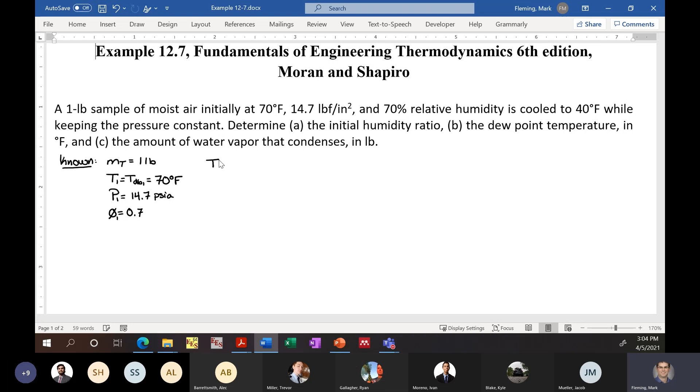Now we're going to be cooling this down to the final state. So this would be the final temperature, T2. Note this is the dry bulb temperature at state 2, and this is going to equal 40 degrees Fahrenheit.

So we have our final state, and we'll note that this is done in an isobaric fashion, so P2 is equal to P1. Now in terms of drawing this system out, let's try and put a visual to this. Basically what we're going to do is we're going to have a piston cylinder style setup. So as we're changing the temperature to maintain a constant pressure, we're going to have the piston be able to move, and that way the pressure in our system remains constant. So this is basically the setup that we have. Now we'll note that we're going to be dealing with moist air.

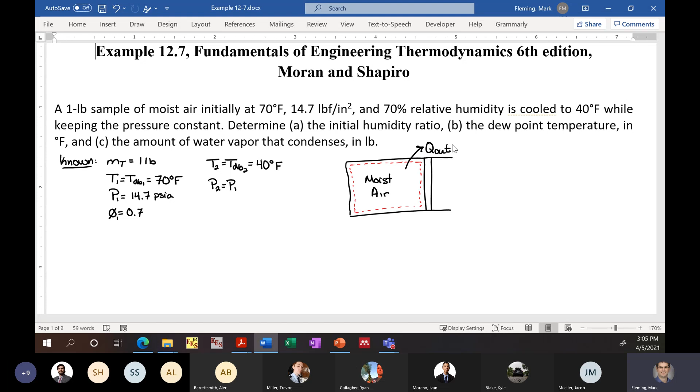The moist air represents the air plus the water vapor inside of our system. We'll note that we're going to be cooling it down, so we had some heat transfer out that's going to cause some of this water to condense.

We want to look at how we go about mathematically modeling this, and what are the things that we need to find and what we need to assume.

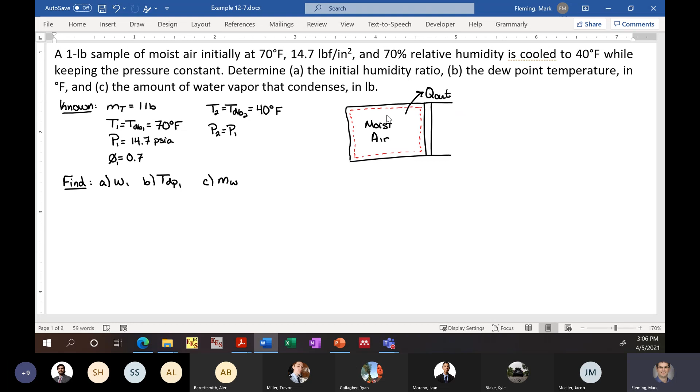In terms of our find statement, first we're going to use what we know to calculate the humidity ratio at state 1, also called the specific humidity. We're also going to calculate the dew point temperature at state 1. And for part C, we're going to calculate the mass of water that condenses, the amount of liquid water inside this cylinder after we change the temperature. That's what we're going to be looking for.

Now, in terms of getting to the final point, we're going to have to make a few assumptions. Let's go ahead and write down everything that we want to assume in terms of our analysis.

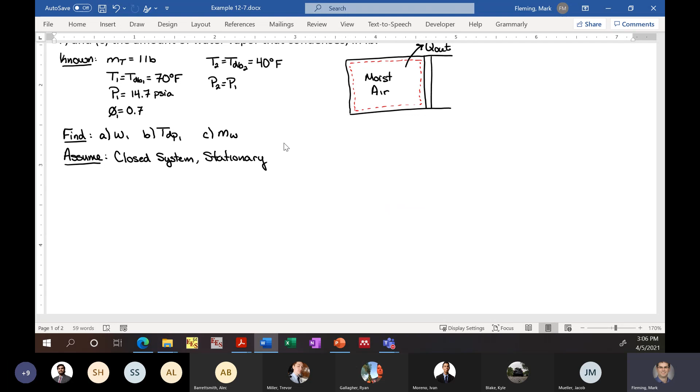We're going to note that this is going to be a closed system. We're going to note that we're dealing with a stationary system. We're also going to assume that we have an ideal gas and an ideal mixture.

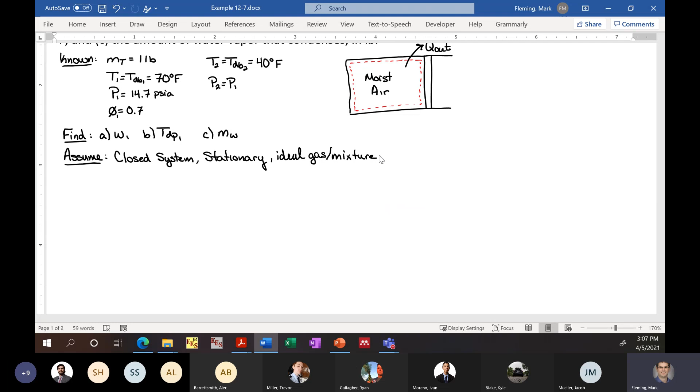So those were our base assumptions leading into the psychrometric analysis that we needed to do. Those are the main things we're going to have to assume. Once we've got that down, we can push forward into the actual analysis.

Now, in terms of the analysis, we're going to start by looking for our first deliverable, which is the humidity ratio here at state 1. If we recall from the base definitions, the humidity ratio is the mass of the water vapor at state 1 divided by the mass of the dry air at the first point.

Now, we don't know either of those, but if we know this is an ideal gas, we can relate these to the partial pressures. When we did that, we ended up with a constant out front, 0.622, which was the ratio of the molecular weights. We then had our partial pressures: P of the vapor at state 1 over the total pressure at state 1 minus the partial pressure of the vapor at state 1.

So this was the partial pressure of the vapor divided by the partial pressure of the air. We said we could relate the air, since we're assuming only two parts, to the total pressure and the partial pressure of the vapor. We were given the initial pressure, that was 14.7 psi, and the only other variable here was the partial pressure of our water vapor.

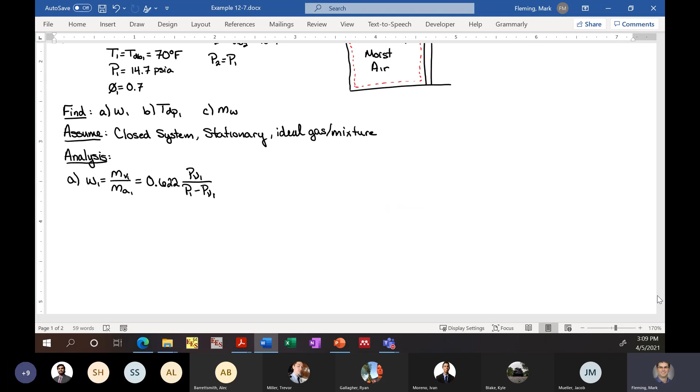So we just need to determine the partial pressure of the water vapor to make this calculation. If we think back to other things we know, we're going to have to use another definition. If we go up to what we were given, we have a total mass, temperature, and pressure.

And we were also given this last value right here, which was our relative humidity. So let's go ahead and see if we can do something with the relative humidity. Now, the relative humidity at state 1, by definition, is the mass of the water vapor divided by the mass at the saturation condition of the water vapor.

When we did the ideal gas analysis on this, we found this is equal to the partial pressure of the water vapor at state 1 over the saturation pressure at state 1 for the same gas. Again, these are at the same temperature, T dry bulb at state 1 for both of these lookups. At this point, we were given this value, that was 0.7.

So if we rearrange this, we can now find the partial pressure of the vapor. That's going to be a function of the relative humidity at state 1 times P sub G at state 1. And so we just now need to look up what is P sub G at state 1.

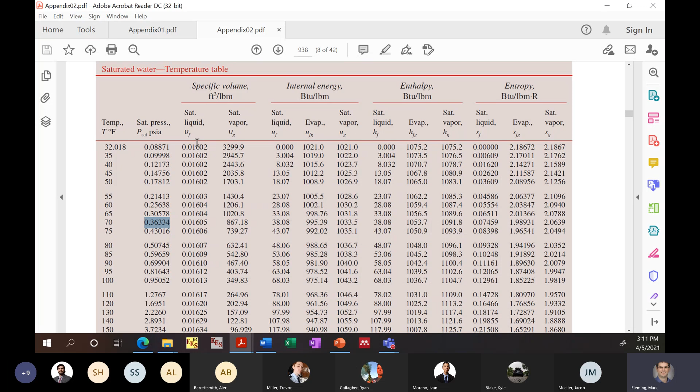Now remember, P sub G was the saturation pressure at the given temperature. So if we pull up Appendix 2, we just need to know the temperature, which was 70 degrees Fahrenheit. We look right here in the table and find P saturation at that point, and that is 0.36334 psi.

So we'll use P sub G1. We looked it up at the given temperature, and again, that was 0.36334 psia. And so we have our first lookup value.

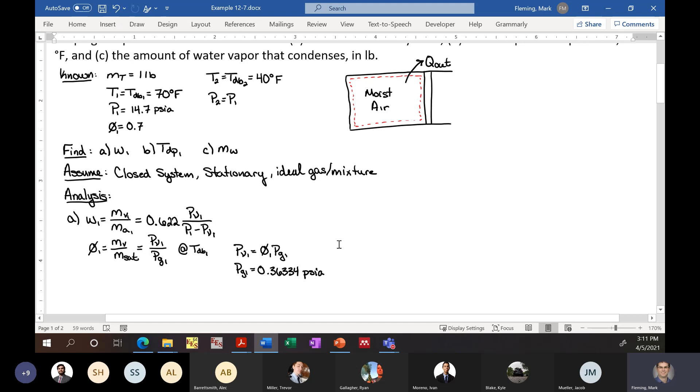Once we've looked up this value, we know the relative humidity, so we multiply that by 0.7, and we can get the partial pressure of the water vapor. This is going to be 0.25434 psi, and we'll note that that's the actual pressure.

So we see that the partial pressure of our water vapor is very, very low in terms of the total pressure, only a small fraction. Because it's at a low temperature, we had to look up the saturation condition, and that is the value. So the partial pressure of the water vapor will always be very small, which tells us that water is only a small component of the moist air.

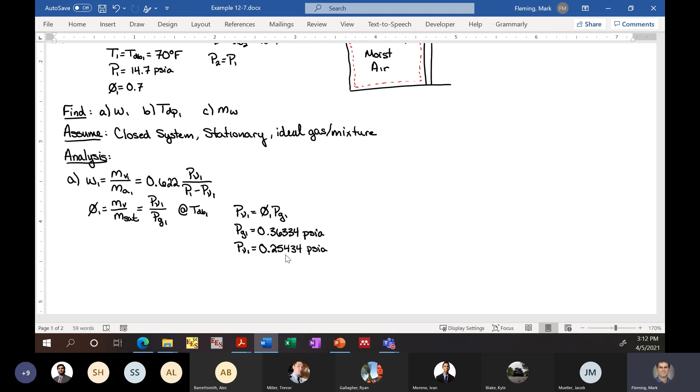Okay, so now that we have the partial pressure of the water vapor, and we have a total pressure, we can go ahead and compute the humidity ratio at state 1. This is going to equal 0.01095, with units of pound of vapor divided by pound of dry air. So there we go, we have our first calculation for our psychrometric system: the humidity ratio at state 1.

And so all we did here is we combined our base definitions, used a table lookup, and were able to find that initial point. Okay, so now we can go ahead and move on to part B, where we were asked to figure out the dew point temperature.

Now, if we recall the dew point temperature, our base definition for this is T dew point, which is equal to the saturation temperature at the given partial pressure of the vapor. And so we have to go ahead and do this lookup.

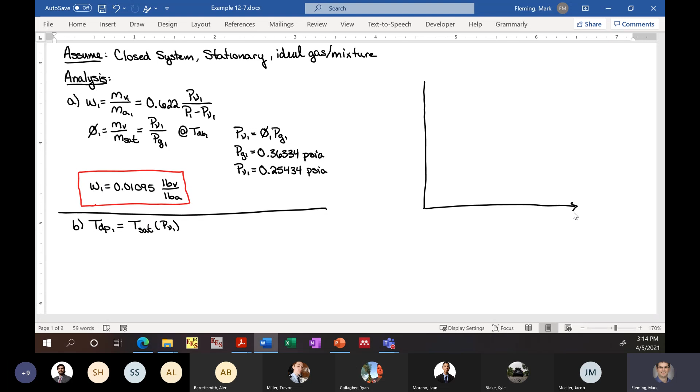Now, before we go too far, I do want to draw a T-S diagram to give us some visuals on this system, just so we're keeping track of what we're doing and where we're going in the table. So this is S, this is going to be our T-axis. We'll draw in our vapor dome, trying to keep it mostly to scale, and we're starting somewhere out here. This is our initial point.

And we're going to have to figure out some temperatures, which we'll do here in red. If we drew a dashed line over to the left-hand side, this would equal the dry bulb temperature at state 1. We'll label it here once we get all the lines in. So again, that is the first temperature that we had. Let's go ahead and get some pressure lines in here, which we'll do in green.

So we have the partial pressure of our vapor. Let's do a little shallower here - this is going to be the partial pressure P vapor 1, and again this would go down over here, and that would be the vapor pressure. We already looked up P sub G1, so let's note that P sub G1 will be calculated right here. So this is now P sub G1, at the temperature of state 1, and we looked up that pressure right there.

And so what we want to do is find the dew point temperature at state 1. If we go back, we said the dew point is the saturation temperature for the given partial pressure. So what we do is follow our line of constant pressure down here.

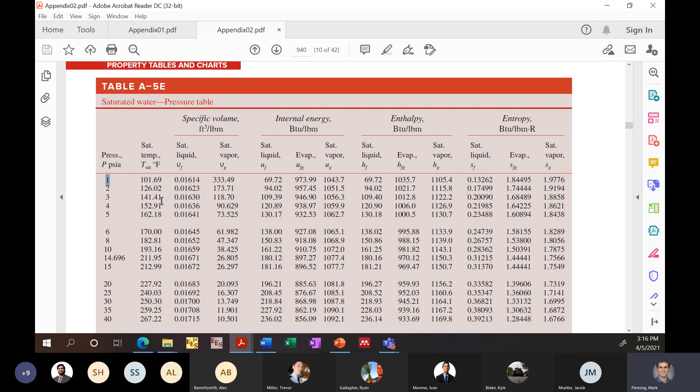We can't do any linear interpolation. So what we have to do for almost all of our psychrometric calculations is go to the temperature table. Even though we know pressure, we're going to use the temperature data for our linear interpolation.

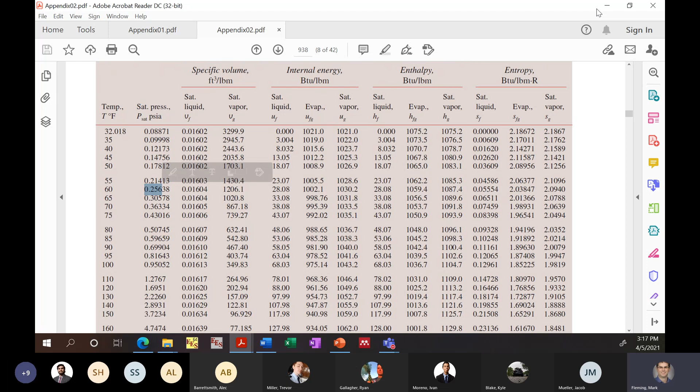So if we looked at this, our pressure was 0.254. If we look, we see 0.256 gives a value, and 0.214 gives another value, so it's going to be somewhere between 55 and 60 degrees Fahrenheit. We'll have to do a little linear interpolation, but 0.256 is pretty close to 0.254, so we expect it to be pretty close to 60 degrees Fahrenheit.

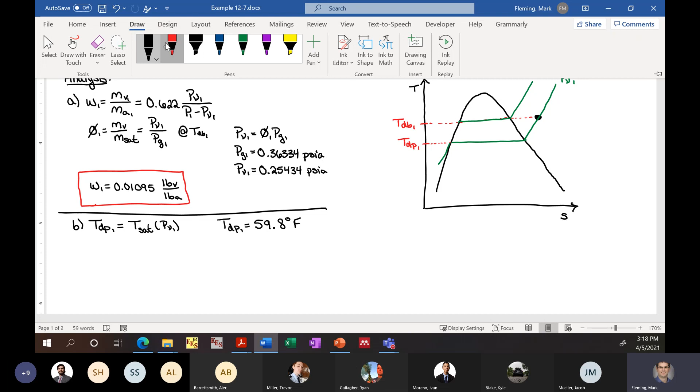I'm going to save us some linear interpolation here. What we're going to find is if we go to the table, the dew point temperature for state number 1 is going to equal 59.8 degrees Fahrenheit. This value was determined just from using the partial pressures and going to the table for our lookup. That's all we have to do for the dew point temperature. We're basically cooling it down to the saturation condition using the partial pressure of the vapor, and we can now calculate that temperature from the lookup tables.

So basically what we've done is gone to 2 different points in the table. First, we looked up the partial pressure at the given temperature for the saturation, so we looked up P sub G, using the temperature that's known. Then we can also repeat the process using the partial pressure that's known, and that would be our dew point temperature. So keeping track of what goes where in terms of the lookups is important.

Now if we want to move on to part C, it was asking us how much water was going to essentially condense in this process. We said, well, instinctively, the dew point is the temperature where condensation begins. Our final state is at 40 degrees Fahrenheit, so 40 is less than, well, we'll just say 60 for rounding purposes. We are going to have condensation occur because the temperature is going to go below this point.

Now, there's a few different ways we could calculate this. The first way is just to do this calculation: we know that our state 2, T2, is going to be less than T dew point 1, so we could have condensation.

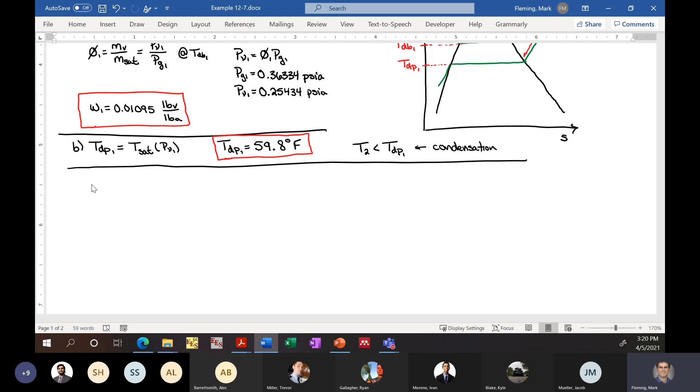So that's kind of our first example showing that we know condensation is going to occur. The other thing we could note, if we weren't sure what was going on, is we could figure out what's being held constant in this process and make a comparison. In this process, we're cooling it down, so if we didn't have condensation occur, what would happen? What would happen if we maybe had a temperature that was higher than our dew point?

If we thought about it, in this case, no phase change would occur. So we could say our humidity ratio here would equal a constant. And so if the humidity ratio is constant, maybe we could use this to check the final point. Now, I want to point out it's not constant all the way through our process—it would only be constant outside of the two-phase region. So when it is a vapor, it remains constant.

Now, the reason I want to show you this technique is because this is the technique you're going to need on, I think, your second actual homework problem. That's the one where you're going to look at some partial pressures and figure out how much of a change happened in the system. This is the sole reason I wanted to discuss this.

So if we can assume right now that W is going to equal a constant, let's see what happens when we say W1, humidity ratio of 1, has to equal the humidity ratio of 2. All that we're saying here is that we have the mass of the vapor over the mass of the dry air equaling a constant. This is what we mean by a closed system—we can't have anything change that. We just want to see what happens if we make that assumption. We calculated W1 earlier, so we can go ahead and set this equal to W2.

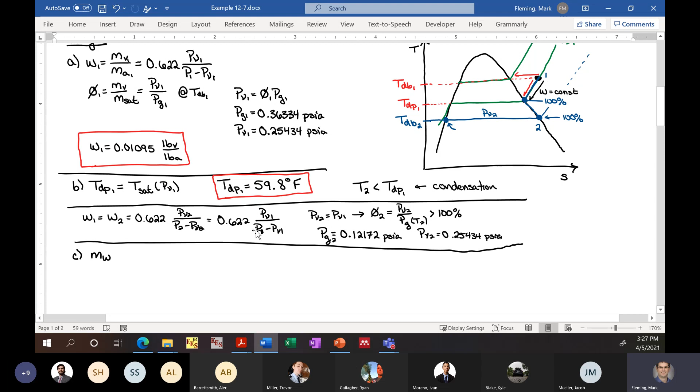Part C, we're looking for the mass of the liquid water. Now, to get the mass of the liquid water, we are going to have to use conservation of mass. So that's going to be our key thing here, and we're going to do it on a species analysis.

So for conservation of mass, noting that it is a closed system, we'll start with air. The change in the mass of the air for the system, by definition of a closed system, we are having a control mass. We're just tracking the same amount, so we can have no change in mass of the air. What this means is the mass of the dry air at state 1 has to equal the mass of the dry air at state 2.

And so we can generally say that this is just the mass of the dry air. That's nice, but why does that help us? Well, let's go ahead and take a look at the water side. The water side includes both the liquid water and the water vapor.

Noting that we have a closed system, delta M of the water has to equal 0. And we said, well, this would equal the mass of the water at the final state minus the mass at the initial state, we'll just call that I. And so we have this change in mass that has to equal 0. But what we know intuitively from just what we've done before, we said, well, we know water is going to condense out of this system.

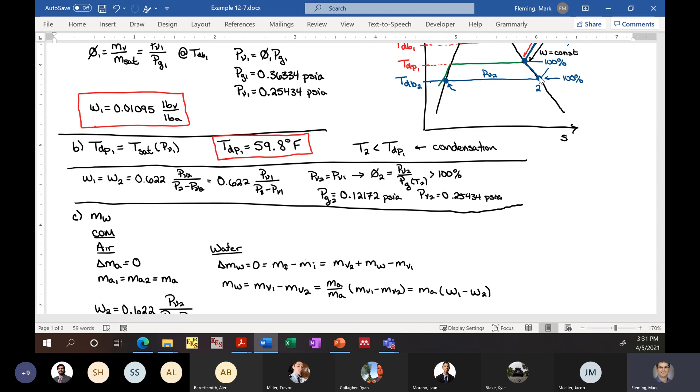For the final temperature, water condensed out, and because water was condensing out, that means we had to be at the saturated state. So we have one other piece of information: the relative humidity at state 2 equals 100%. If it's 100%, that means P vapor 2 has to equal P sub G2, which we looked up earlier. That equals 0.12172 psia.

So now we have the partial pressure at state 2, we can substitute that into our humidity ratio at 2, and find the humidity ratio at state 2. This is going to equal 0.00519, units of pound of vapor per pound of dry air. That gives us the humidity ratio at point number 2.

We need the mass of the water. This will equal the mass of dry air times the humidity ratio of 1 minus the humidity ratio of 2. We now have the humidity ratio of 1 from our first calculation, and the humidity ratio of state 2. But we're still missing the mass of the dry air, so let's figure that out.

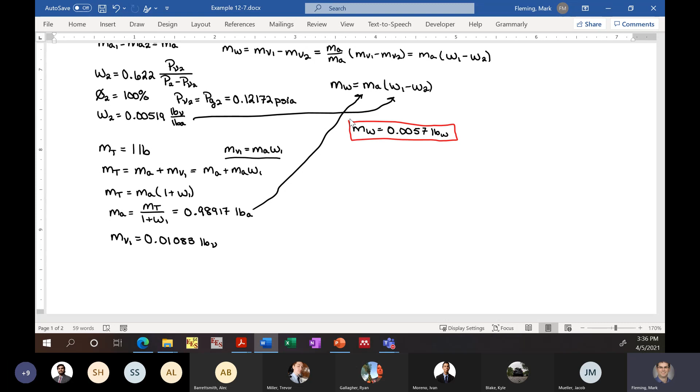Units on this are going to be a pound of water. We'll go ahead and do that. We can see that the amount of water we've condensed is very small, but there is a large amount of energy associated with this phase change, so it's important that we consider that. Again, this was just practice using all of our definitions, applying some mass balances.

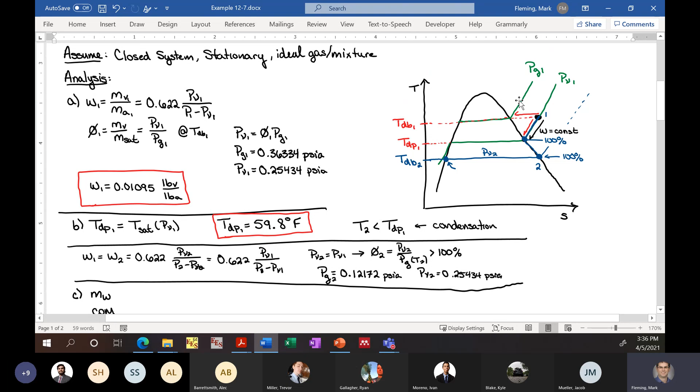The important thing here to remember is making sure that you get all of the lookups correct, and that you can visualize the process on any sort of phase diagram. Here we used a T-S diagram. We can see what our partial pressures were and where we had to look things up in the table, and why we did those lookups for this given problem.

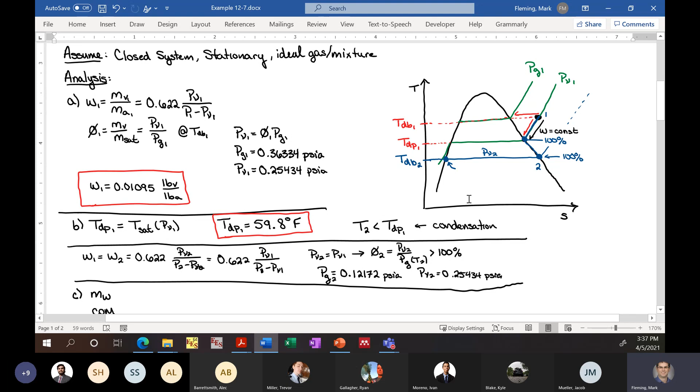So that is going to be the end of this example problem. If you have any questions about this, please let me know. Otherwise, at this point, I want to go ahead and switch gears.

Push into the new topic for this week, and that is going to be the psychrometric chart. This is going to be the new piece we're talking about this week, and it's very important for HVAC applications. We're going to be using this quite often in our discussions to help with our analysis, so we want to spend a little time working with this.

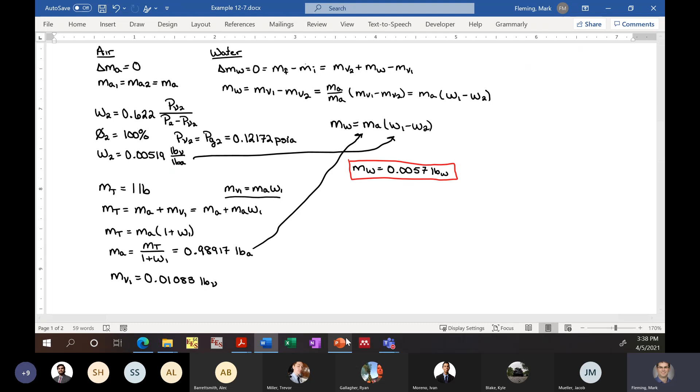Now I'm going to see if I can fix the screen here. Give me one second. See if I can get this to show up. Okay, well, looks like we'll just have to go with this as it is — the screen's a little messed up right now.

The psychrometric chart is what we want to use to help bring all of these terms together, to help us visualize what's going on in terms of air conditioning processes. Before we get into what the psychrometric chart is, we want to talk about the key terms that we need to know for any sort of process.

In terms of these process terms, the first is that we need to have the dry bulb temperature. If you remember, the dry bulb temperature is our standard temperature measured by any thermometer. This is going to be one of the key measurements that we will make, so we're going to want to include this on the chart.

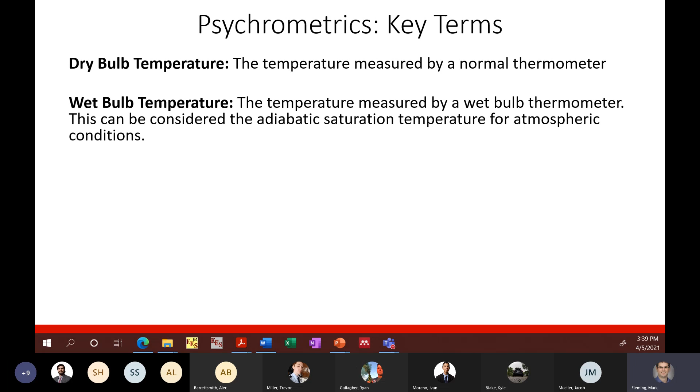We're going to want to be able to figure out what the wet bulb temperature is. This is important for the adiabatic saturation temperature, which was historically used with the psychrometric chart to help determine the initial state. So we're going to want to figure out what the wet bulb temperature is.

We're also going to want to find the dew point temperature, because that tells us if we drop below a certain temperature, we'll have water condense. So we need to know that, to be aware of where we are for phase change.

We're also going to want to include our two new terms: our humidity ratio, which tells us the amount of water vapor in the air, and our relative humidity, because this was the term when we talked about atmospheric science — that's pretty much the most common value that we have.

They said that's pretty important for human comfort. Humans generally like somewhere between 30 to maybe 60% relative humidity. If it's too high, it doesn't feel very comfortable; if it's too low, it feels very dry. Somewhere between 30 to 60% is pretty good for comfort, with 30 to 50% probably considered standard. So we want to be able to relate all of these terms for most HVAC processes.

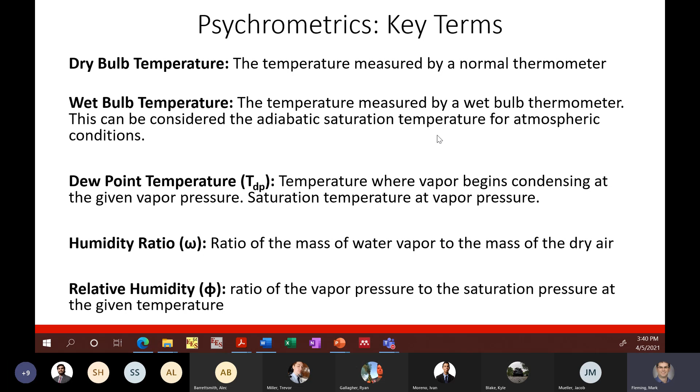That's the whole purpose of the psychrometric chart. It brings all of these concepts together for HVAC systems, so heating, ventilation, and air conditioning systems. One thing to note is that for HVAC systems we assume the total pressure is essentially 1 atmosphere.

If we're dealing with 1 atmosphere of pressure, we can use this chart to do all of the lookup. This reduces the number of variables down to essentially 2, because we fix the pressure at 1 atmosphere. If you think of atmospheric science, everything is about one atmosphere. If you change positions on the globe, like in Denver, it might be a little different, but we can use this as a pretty good approximation for most HVAC systems.

So what we wanted to do is create this visual and put all of these pieces together. Now, this is kind of a simplified view of what the psychrometric chart's going to do, and we'll look at what we can find on the chart.

What we want to be able to read is our temperature, so the dry bulb temperature, that's our actual temperature. We said that is going to be one of the most common measurements we have, so that's going to be the x-axis. One of the most important outcomes we want is our humidity ratio, which is also called the specific humidity.

We're going to put that on the y-axis so we can easily look it up once we've established where we are, and be able to look that value up. We wanted to be able to draw a straight line and get that value with some precision. That's going to be on our y-axis.

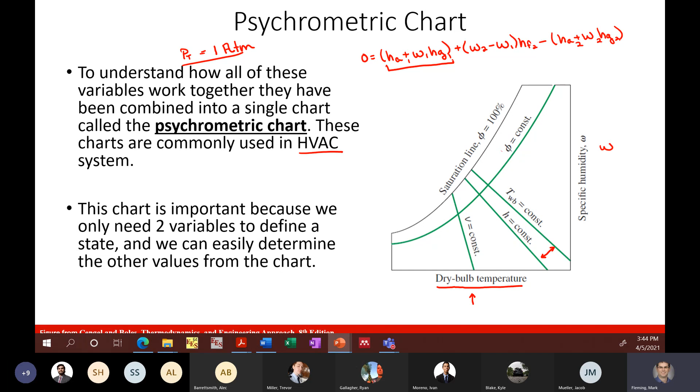So H air plus the humidity ratio at 1, H sub G1, noting that this is at state 1, and this would be state 2 over here, state 2, 2, and 2, then we had 1 over here. Now what we can do is combine these terms into a single enthalpy, so this will be H2, this will be H1. So we get 0 equals enthalpy 1 minus enthalpy 2, plus W2 minus W1 times the enthalpy of the water.

What we're going to see, and why these lines are so similar, is if we recall from the example we just worked, W2 and W1 are our specific humidity ratios. Those are pretty small numbers. If we go to the numbers we got before, state 1 we had W1 equal to 0.010, roughly 0.01 for the first one, and the second value was 0.005. So we're basically looking 3 decimal points out for those, and the change in that is going to be pretty small.

So we say that this value is pretty small, and the enthalpy of water on the liquid side is much lower than our vapor side, so we can kind of say this value is small, almost 0. So what we'll see is the lines of constant wet bulb and constant enthalpy will basically be the same.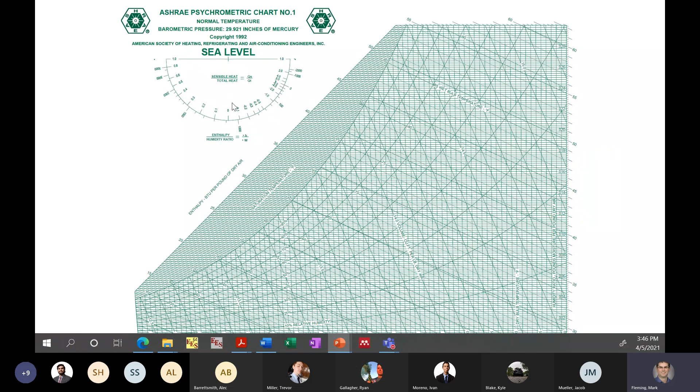This I think is the SI units version. And then I provided one also here, this would be the English unit version. So we can do this in both sets. These are again from the American Society of Heating, Refrigerating and Air-Conditioning Engineers, so basically ASHRAE, same thing we have here, just higher resolution, a little better for your lookups.

And so this is what the actual psychrometric chart looks like. We're going to need to be able to use this for some of our homework problems. So a few things I want to point out about the chart.

The first thing we have over here, the right-hand side, is going to be the humidity ratio. I want to point out that the humidity ratio is these values right here on the inside portion of the lookup. Again, this is the humidity ratio. The thing to note about this version is it's going to be grams per kilogram in terms of units - grams per kilogram of dry air. So you have to pay very close attention to all of your lookups and units on your calculations.

In terms of other parameters, we see these diagonal lines coming up - these are lines of constant relative humidity, and we can see these values here. Then we have the saturation line over here on the left-hand side, that's the kind of limiting case, and that would be the 100% relative humidity.

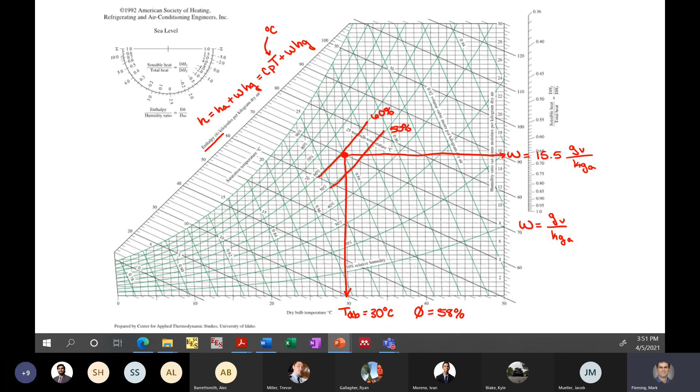So there are three other pieces of information we want to pull off the chart. First, if we want the enthalpy of this system, we follow this solid line up, and we can read that the enthalpy equals 70 kilojoules per kilogram. That's the first thing we're able to read.

We don't even have to worry about our calculations — we can just look that up. Remember, that is the air plus the water, so that's the enthalpy of the moist air that we have.

In terms of other temperatures, we said there were three main ones. The second after dry bulb is the dew point temperature. This would be as if we cooled it down and moved completely horizontal — this is the dew point temperature, about 20.5 degrees Celsius.

The last temperature we want is the wet bulb temperature. The constant wet bulb line is the same as enthalpy, so if we follow the enthalpy line up until we reach the saturation condition, then move vertically, that gives us the wet bulb temperature. So this is T wet bulb, this is T dew point, and this is T dry bulb. In this case, the wet bulb temperature is about 21, 22, 23 degrees Celsius.